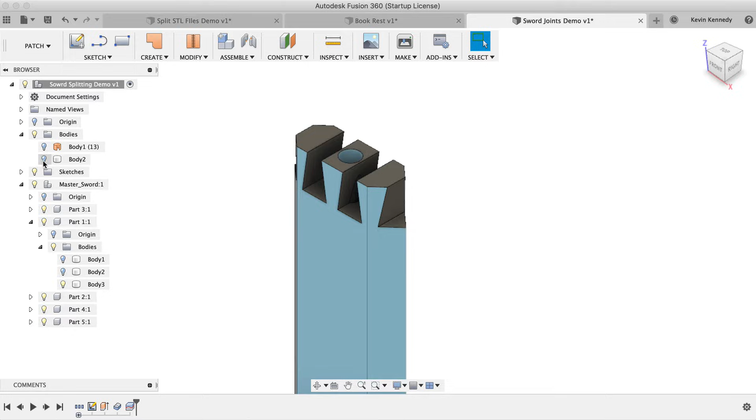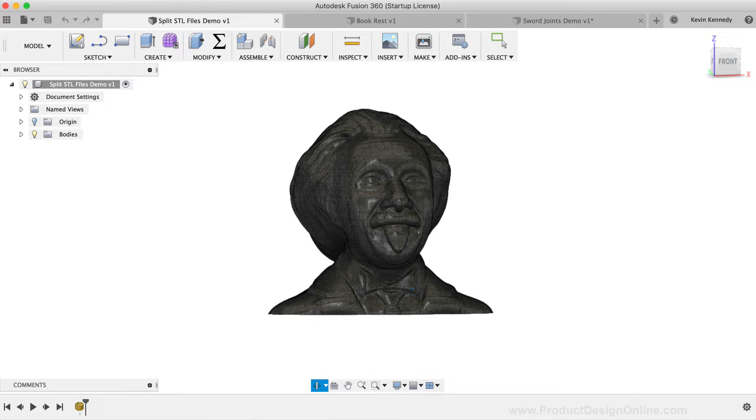By the end of this video, you'll know how to use Fusion 360 to split up your large STL files for easier 3D printing. This tutorial has two main workflows, depending on what type of model you're working with. The first workflow I'll cover is how to split STL mesh files. In other words, a lot of Fusion 360 users import an STL file from Thingiverse, and they need to slice the file into smaller pieces so it fits the size of their 3D printer's build plate.

For the second workflow, I'll show you how to split up your model if you built the model directly in Fusion 360, or if you've imported a solid body, such as a STEP file. This method has similar procedures, but will be working in a different workspace. Also, be sure to stick around until the very end of this tutorial, as I'll show you a trick or two that will help you make joints so each 3D printed part fits together firmly.

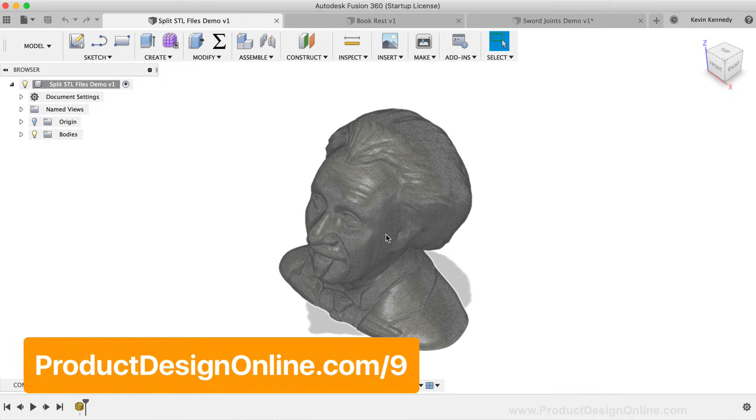I'll start off by showing you how to split up this Einstein mesh file that I grabbed from Thingiverse. I'll select the measure tool in the toolbar. Then I'll select the bottom of the model and the top of the model. You'll see that this model is fairly large with a height of over 1200 millimeters. This model is too large to print on most consumer level printers at its current size. So let's take a look at how to split the model into smaller pieces.

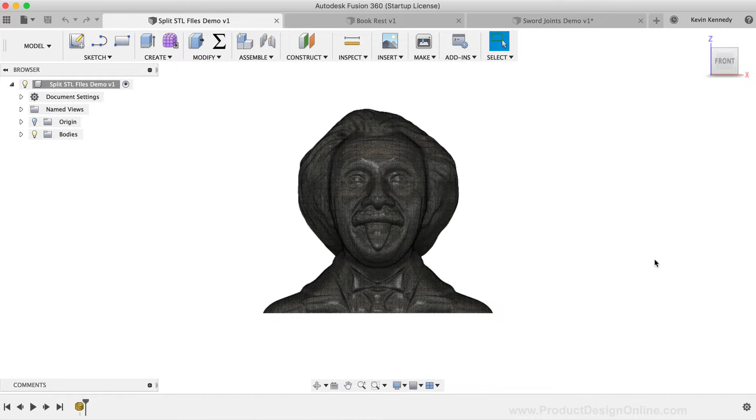Because this is a mesh file, we'll first need to enter the mesh workspace, which will let us access some additional tools that only work with mesh files. If you select the workspace drop-down list, you'll see that the mesh workspace option is not available. To access the mesh workspace and its tools, you'll first have to turn it on in your preferences. I'll select my username in the upper right-hand corner. Then, I'll select the Preferences option. This opens up the Preferences dialog box.

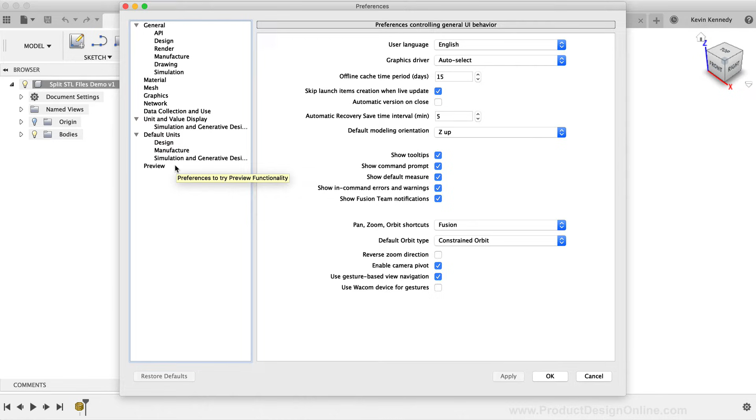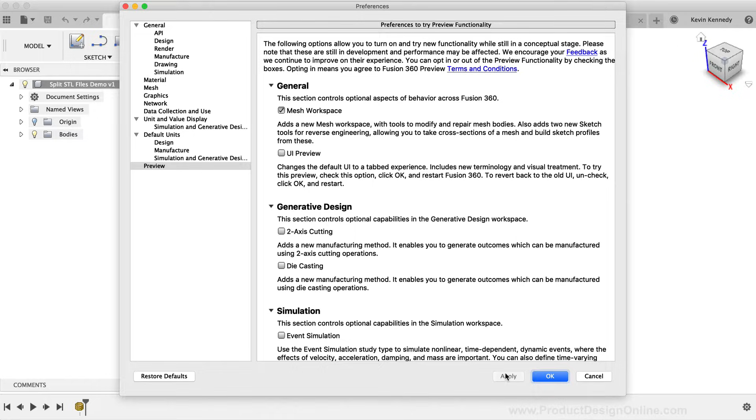From there, we'll need to select the Preview tab on the left-hand side. You'll then see the Mesh Workspace is a preview option as its functionality is still being beta tested. So to turn on the Mesh Workspace, you'll have to select the checkbox, hit the Apply button in the dialog, and then the OK button. Then you'll have to restart your copy of Fusion 360 to get the changes to take effect.

After restarting your Fusion 360, you'll see the Mesh Workspace still isn't available in the Workspace drop-down list, and that's because we're still in parametric modeling mode. We'll have to enter direct modeling mode, which doesn't capture the timeline history down below. Now, this is required because of the complex nature of mesh files and the fact that Fusion 360 cannot simply record each action that we take.

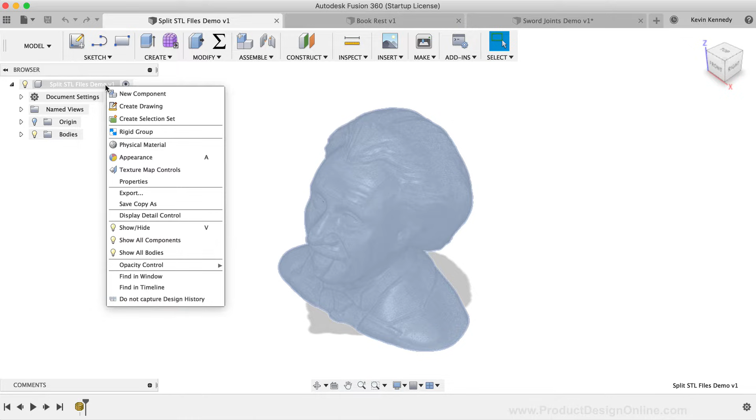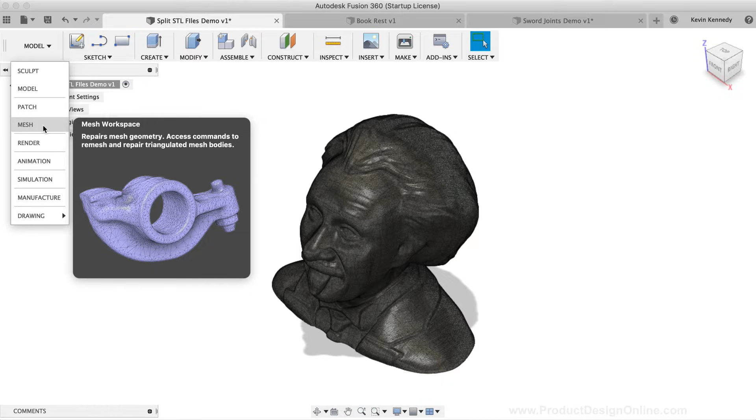To enter direct modeling mode, simply right-click on the top-level component of your file. Then select Do Not Capture Design History. You'll then get a warning message that Fusion 360 will no longer capture your model's history, which we're okay with, so I'll click the blue Continue button. If I now select the Workspace drop-down list, you'll see that the Mesh option is available. I'll select the Mesh Workspace option, which then gives us access to the unique mesh tools.

If you click on the Modify drop-down list, you'll see that there is a Plane Cut option. This is the tool that we'll use to cut the model into pieces. The Plane Cut tool lets you use an interactive plane, which opens up after you select the mesh body. The interactive plane can be moved around. However, I find that it works best to first create some construction planes exactly where you want to split your body, and then we'll reference them instead of using the interactive plane.

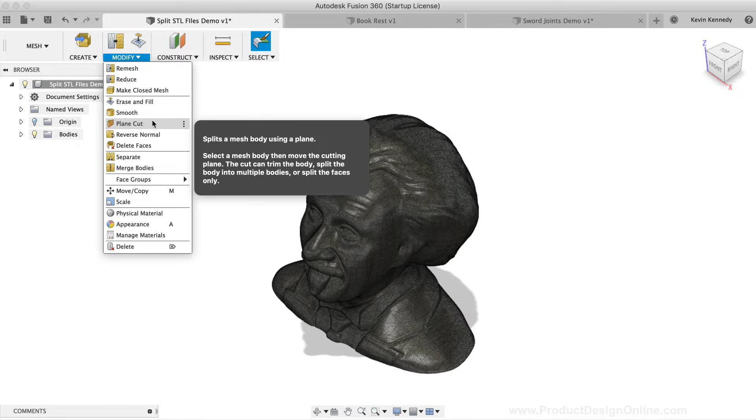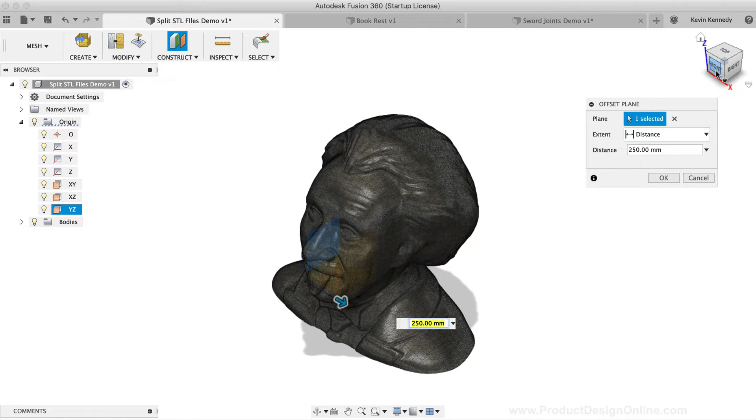To do this, I'll make sure the origin planes are turned on by selecting their corresponding light bulb in the Fusion 360 browser. Then, I'll select the offset plane option in the toolbar. I'll select the YZ origin plane as the surface to offset from, and I'll drag the blue single directional arrow over. I want this plane to be in the center of Einstein's face so I can split it down the middle.

I'll type out 540 millimeters for the offset distance. If you're following along with your own model, then you'll have to enter your desired distance based on where you want to split the model. Lastly, I'll click the OK button.

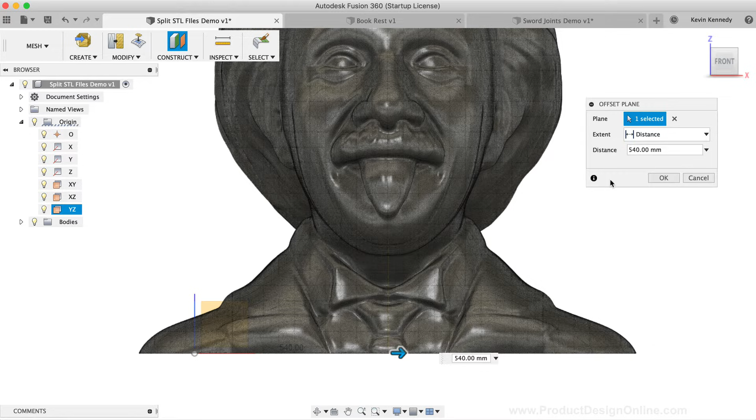I'll now select the Modify drop-down list in order to activate the Plane Cut tool. You'll see the first option in the Plane Cut dialog box is to select the mesh body. This is where you'll need to select the mesh body of your model. In this case, I'll select the Einstein body.

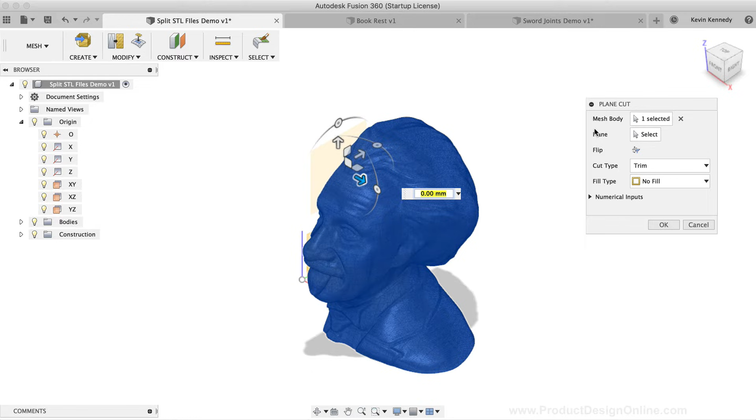The next option in the dialog box is the plane selection. I'll click on the plane selector and then I'll select the offset plane that we just created. In some scenarios, you may even find it beneficial to select the construction plane in the Fusion 360 browser, ensuring that you don't accidentally click something else.

You'll then see that we need to choose the cut type. If I select the drop-down list, you'll see that there are 3 different options listed. The trim selection will delete 1/2 of the body, trimming it away. The split faces option will split the faces at the intersecting plane. However, they will keep the body intact as one single body. This split will also create a new face group on one side of the split.

In our case, we want to completely split the model in half, so I'll select the second option, which is split body. The split body option will split the mesh body into 2 completely separate bodies.

Lastly, before we click OK, we'll want to choose the fill type. Now this drop-down list also includes 3 different options. The no fill option leaves an open hole or boundary at the cut. The uniform option fills the holes with new faces of the regular shape based on how the mesh triangles line up. Last but not least, the minimal option fills the hole with the minimum number of faces possible, which usually results in long, thin mesh faces.

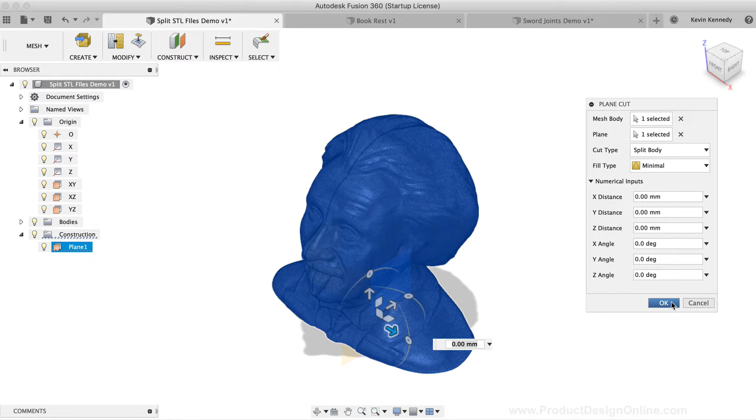It's also important to point out that you can toggle open the numerical input section, where you can translate or rotate the cut plane using numerical values. After selecting the minimal option, I'll click the OK button. Depending on the complex nature of your mesh file, this may or may not take a few minutes for Fusion 360 to process. Once it is done, you'll notice that there are now 2 mesh files in the bodies folder of the Fusion 360 browser.

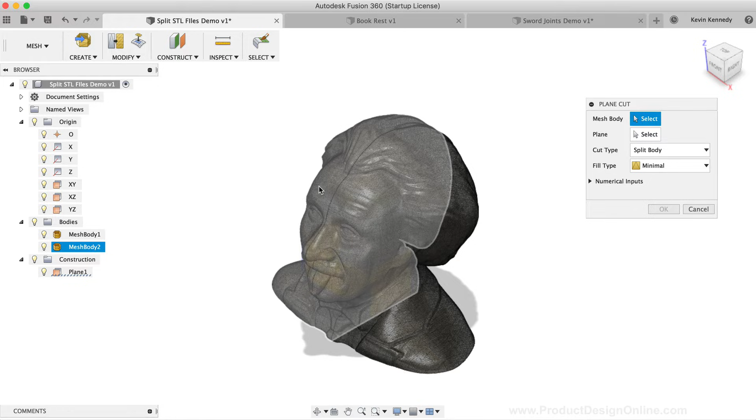At this point, we can cut the bodies into more pieces. Let's take a look at using the interactive plane. I'll right-click in order to select Repeat Plane Cut. Then, I'll select the body on the left side. You'll see the plane manipulators automatically appear, and we can move them around to reposition the cutting plane. However, as I described earlier, I find this method to be harder to work with, and I typically like to create construction planes that I can reference with the plane selector.

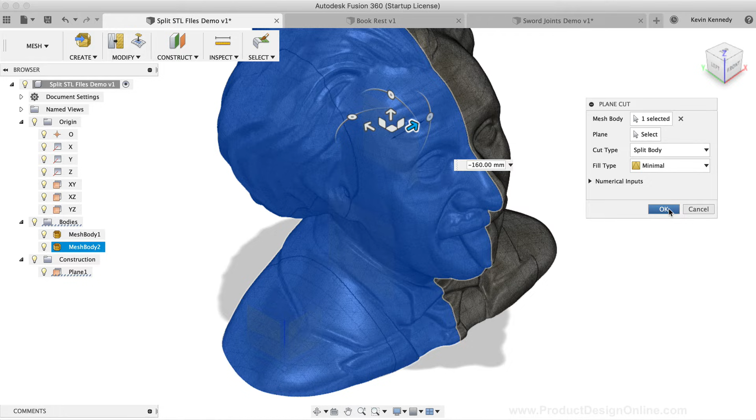You'll see this will cut the bust in the vertical direction. I'll simply drag the blue single directional arrows around until this plane is located near the beginning of Einstein's ear. Then, I'll click the OK button to see the results, as the options are set to the settings that we previously used. As you'll see, we now have a third mesh body in the Fusion 360 browser.

At this point, you can continue to slice the model into sections as you deem necessary to fit the parts on your 3D printer's build plate. You'll then be able to right-click on each mesh body in the Fusion 360 browser to save it as an individual STL file.

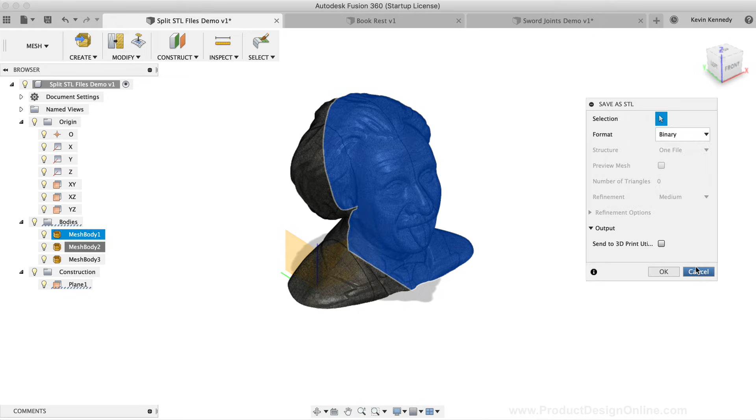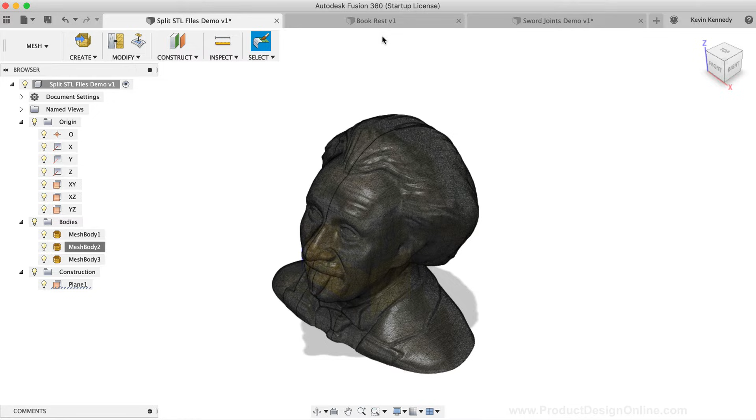Before we move on, I should also point out that this next method I'm going to show you will also work on mesh files, not just solid bodies. However, I recommend that you use the mesh workspace when splitting STL mesh files, as you'll have more control over the mesh faces. Let's now take a look at splitting up a solid body file that was either built in the model workspace or a model that was imported from a STEP or F3D file.

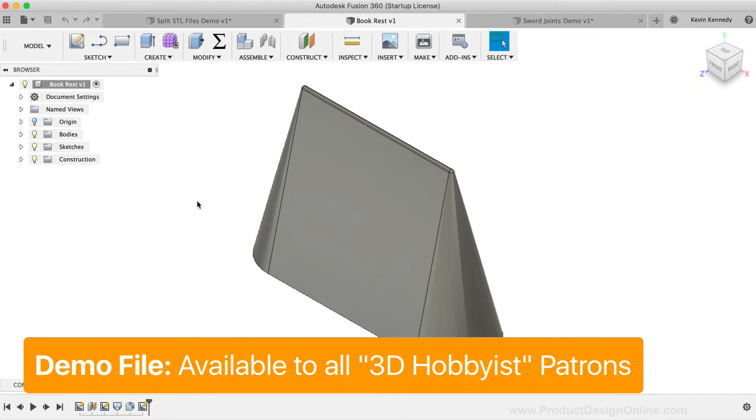For this demo, I'm going to use a bookrest that I modeled in Fusion 360, which is too long for the 3D printer's build plate. Therefore, I want to split this model down the middle so it's printable. Now the process is going to be similar to the mesh workspace. However, you'll notice that the tools will function in a different manner. I'm going to first create a construction plane, which I'll then reference with the split body command.

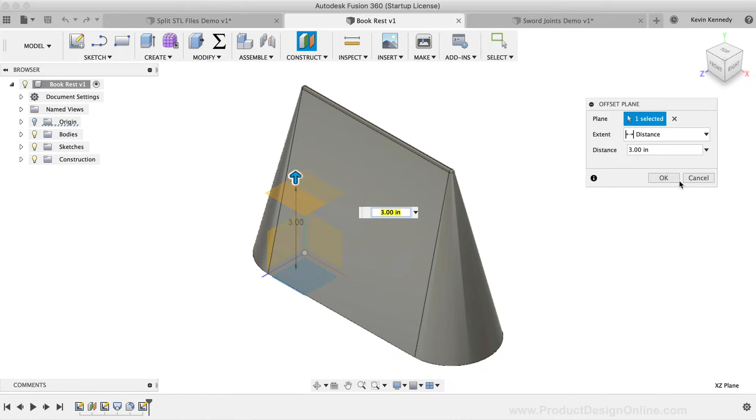I'll select the construct drop-down list. Then I'll select the offset plane option. I'm going to select the bottom origin plane, and then I'll drag the blue single directional arrow towards the top, leaving it at 3 inches, which is about the middle of the design. Then I'll click the OK button to confirm the plane's location. Next, I'll right-click in order to select the Repeat Offset Plane option.

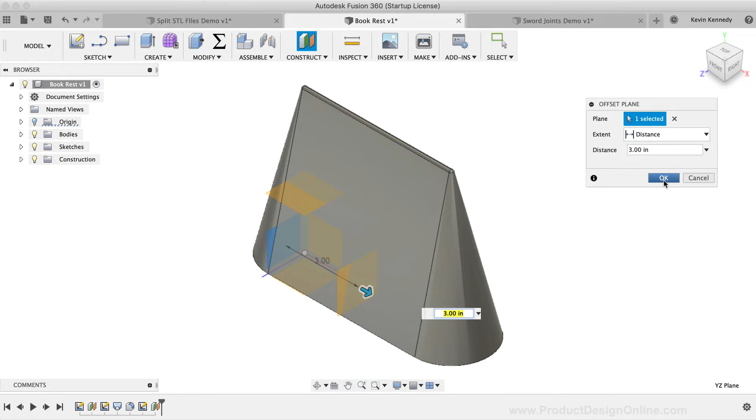I also want to create a plane that splits this model in half in the vertical orientation. I'll select the YZ origin plane, and then I'll enter an offset distance of 3 inches, putting this plane in the center as well. At this point, we'll need to activate the split body command. I'll select the modify drop-down list, and then I'll select the split body command, which is located near the middle of the list. You'll see in the split body dialog box that we first need to select the body to split. In our case, I'll select the bookrest body.

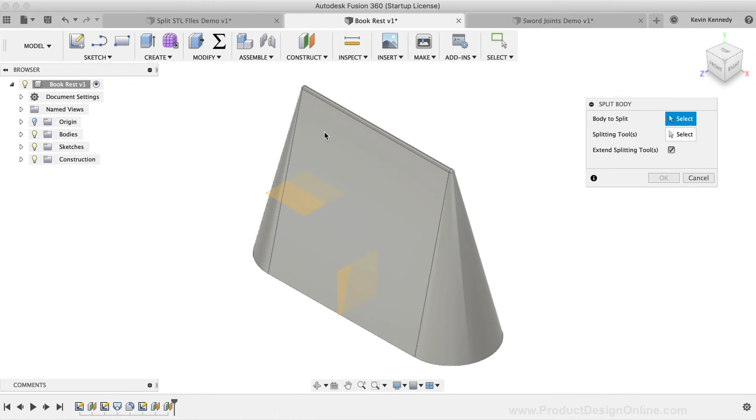However, it's important to note that you will need to select all the bodies that you want to split. I only have this single body, but you can select multiple bodies at once. Once your bodies are selected, you'll need to select your splitting tool or plural tools, as you can select multiple tools at once. Most of the time, you'll be using construction planes. However, you can also use other bodies or faces as the splitting tools. I'll go ahead and select the top offset plane.

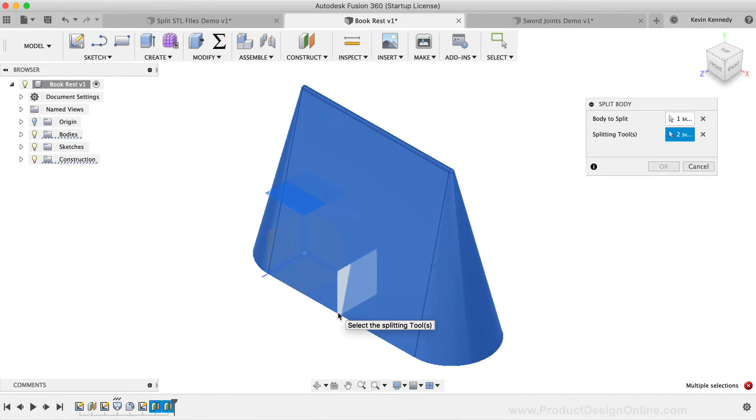Then, watch what happens as I try to select the second offset plane. You'll notice that Fusion 360 doesn't allow this because the tools would collide with each other. Therefore, it's important to note that you can have more than one cutting tool, but their paths cannot cross one another in the same feature. For now, I'll deselect the bottom plane. Then I'll click the OK button. You'll now see in the Fusion 360 browser that I have 2 different bodies in the Bodies folder.

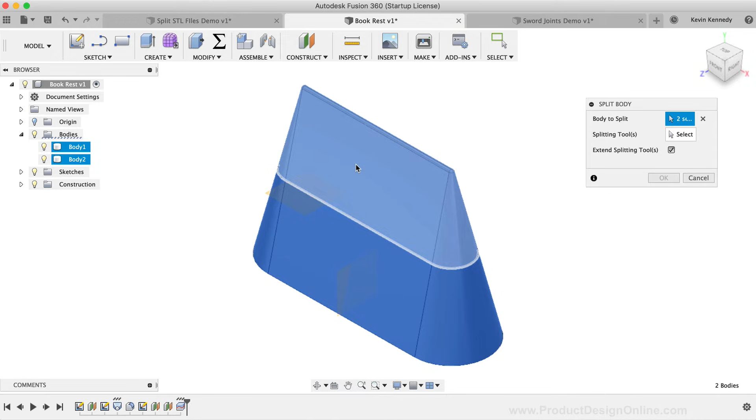I can now right-click to select Repeat Split Body, and this time I'll select both of the bodies. Then I'll click on the Splitting Tool selector, and I'll select the other offset plane. Finally, I'll click the OK button in the dialog box to confirm the results. You'll now see that I have 4 different bodies in the Bodies folder, allowing me to 3D print this design as 4 different parts.

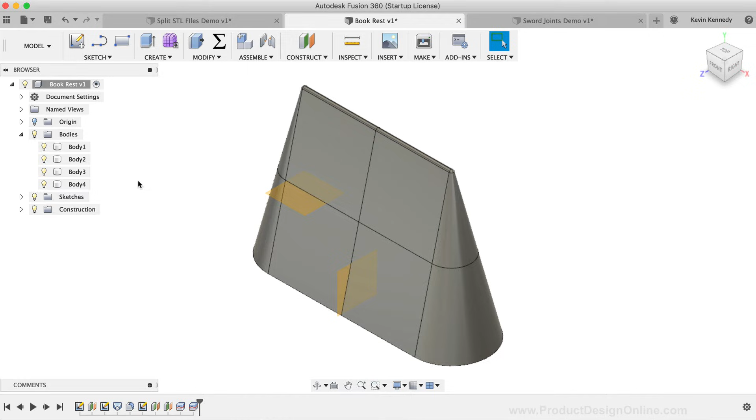At times, you may even find it helpful to move pieces away from each other as you split them apart. To move pieces around, simply select the body that you want to move by clicking on it in the Fusion 360 browser. Then, hit the keyboard shortcut letter M as in Mike to activate the Move/Copy command. Once the Move/Copy command is activated, you'll be able to either drag the bodies around by their single directional arrows, or you can always type out exact distances in the dialog box.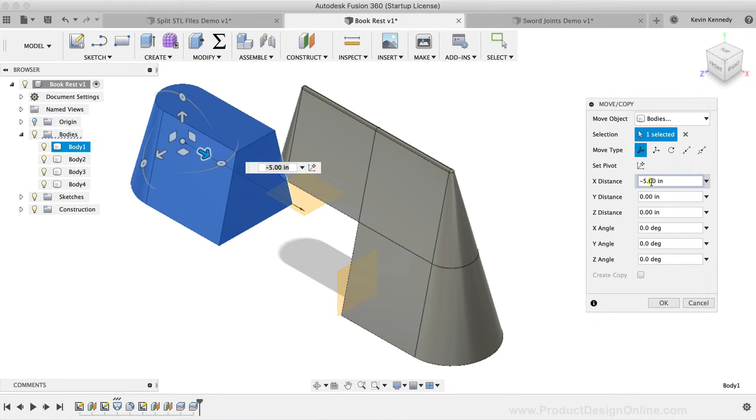One advantage to moving parts away from each other is the fact that you can add registration pins in order to make the parts fit better if you plan on gluing them together after they're printed out.

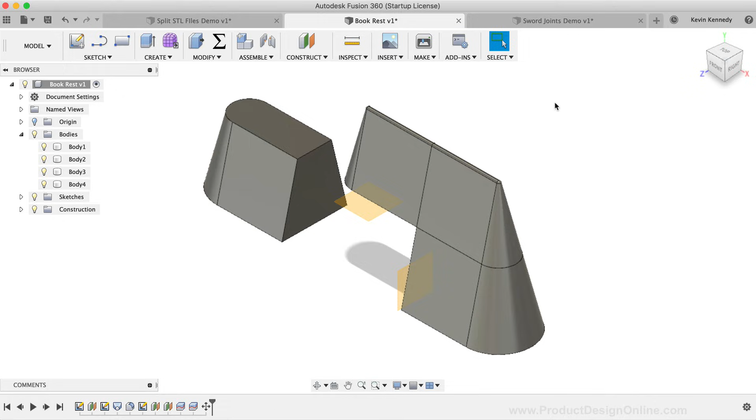Interlocking pieces can help ensure that the 3D printed models are stronger when they're glued together, especially if they're props or other functional items that are going to be tossed around. For this demo, I've grabbed this sword file from Thingiverse, which is to be used as a prop, not a weapon. Now this file was created by Andrew, and I'll have a link to it on this week's resource page.

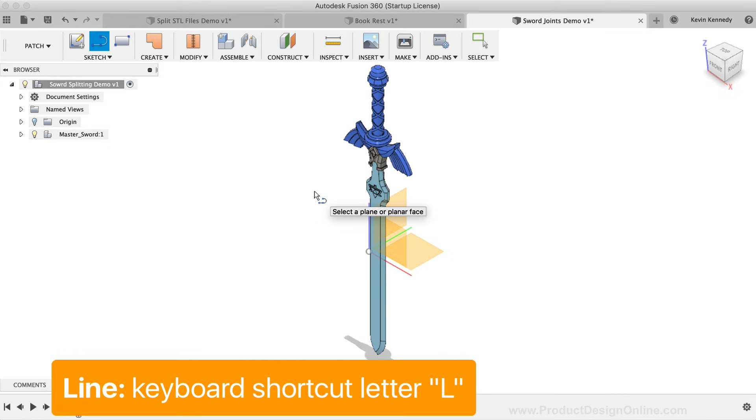I'm going to first start by selecting the patch workspace from the workspace drop-down list. If you're using the newer UI, then you'll find the surface modeling tools in the design workspace under the contextual tab labeled surface. I'm going to then hit the keyboard shortcut letter L as in Lima to activate the line tool. I'll click on the XZ origin plane as the plane to sketch on, and I'm going to zoom in on the sword file so it's easier to see the sketch lines.

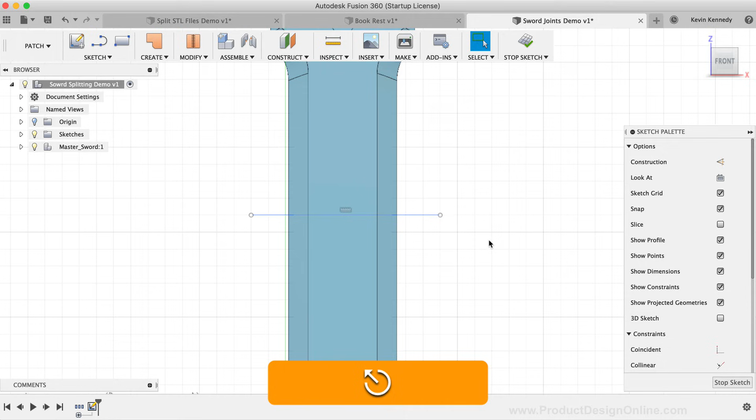First, I'll simply draw a line straight across the blade of the sword. I'm going to use this line as the baseline for a dovetail joint. I'll then hit the escape key to exit the line command. Then I'll right-click to quickly select repeat line. At this point, I'll click on the line and I'll create a line with a length of 10 millimeters.

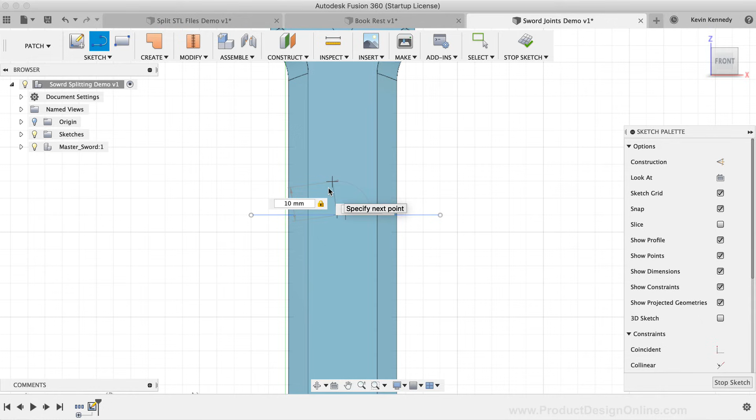Then I'll hit the tab key to lock the dimension in place and I'll type out 98 degrees for the angle of the line, as we're going to make this a dovetail joint, giving the model a lot more strength when it's glued together. I'll then create a line heading to the right 6 millimeters, where I'll click to place this line, making sure that it's horizontal.

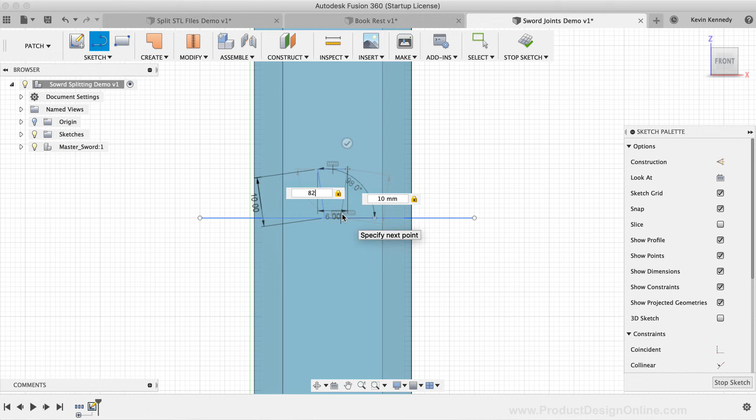To finish off this shape, I'll create the last line with the same length of 10 millimeters. However, this time, I'll have to type out 82 degrees for the angle. I'll click to place the line, and then I'll hit the escape key to exit the line command. We can now fit about 2 more dovetails on the surface of the blade, so I'll use the pattern tool to save us some time from having to sketch them one by one.

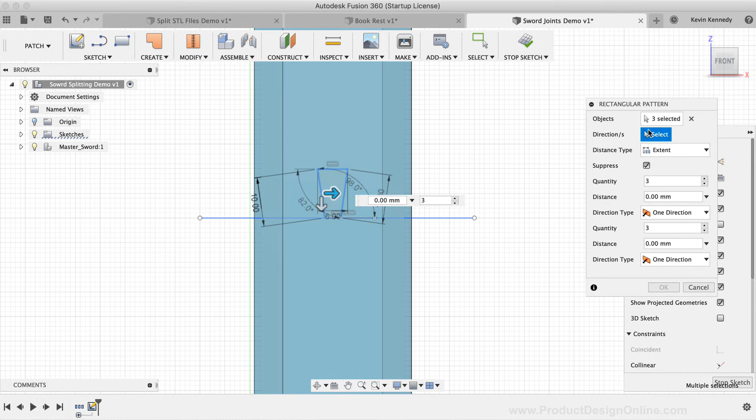I'll select the sketch drop-down list, and then I'll find the rectangular pattern feature. Once the rectangular pattern feature is activated, I'm going to select the top 3 lines that make up the joint shape. Then I'll click on the direction selector in the dialog box. For the direction, I'll select the large horizontal line. Then, I'll change the direction type to symmetric as we need to pattern a copy on each side of the original sketch.

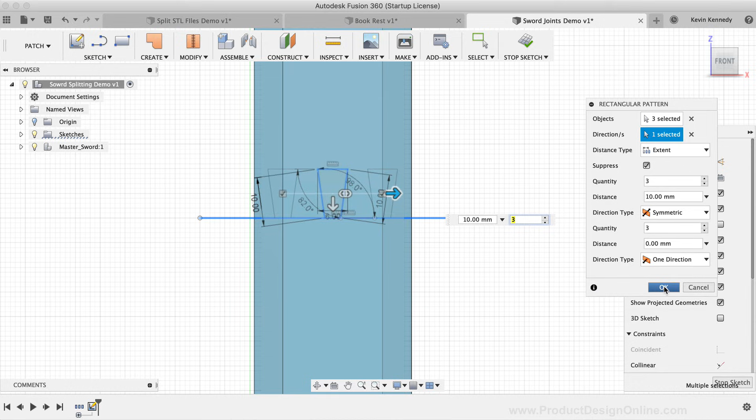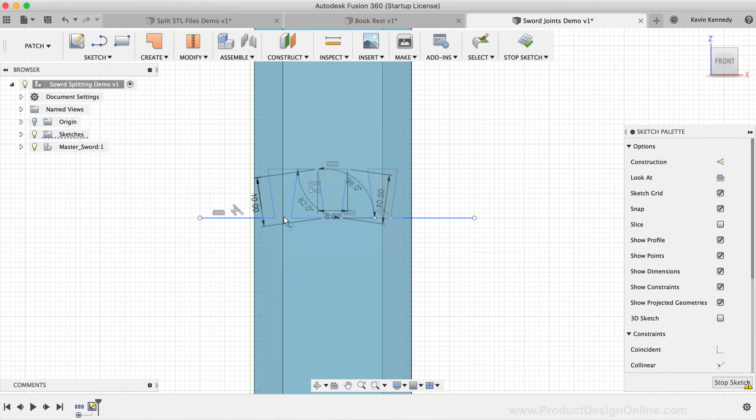After making sure the quantity is set to 3 instances, I'll drag the blue single directional arrow outward until the 3 joints are spaced evenly. Then I'll click the OK button in the rectangular pattern dialog box to confirm the pattern results. Before we can extrude this line into a surface, we'll need to trim away the unnecessary parts of the sketch. I'm going to hit the keyboard shortcut letter T as in Tango to activate the Sketch Trim tool. Then I'll simply click on the bottom lines of each dovetail to trim them away.

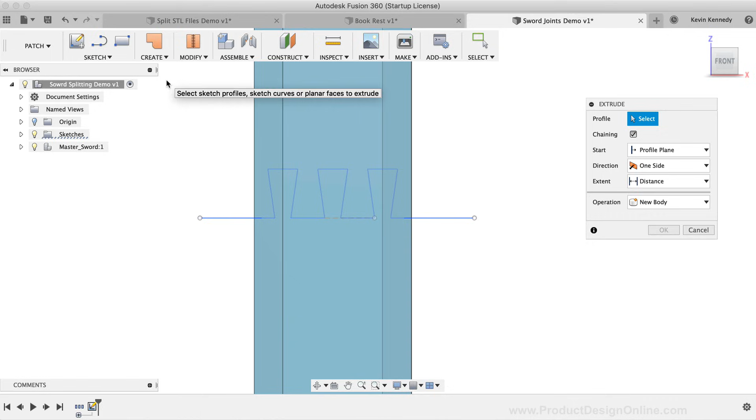We can now select the Create drop-down list and then select the Extrude command. It's important to note that this Extrude command in the Patch workspace allows us to create thin surfaces that we can't create with the Extrude command in the Modeling or Design workspace. We can then thicken the thin surface, which I'll show you how to do in just a minute. First, we'll need to select the lines as the sketch geometry to extrude. I'm going to then click on the right side of the view cube so I can see that the extrude goes through the model. Then I'll change the direction to the two sides option.

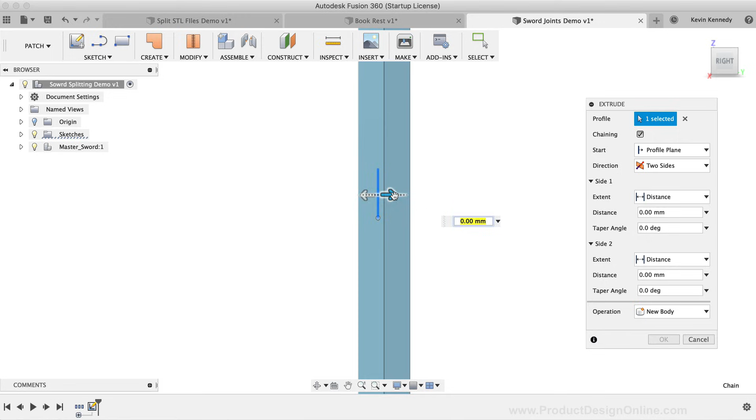This will let me drag both single directional arrows until the extruded surface extends past the object that I'm trying to cut. I'll drag the right arrow until it extends past the blade, and I'll drag the left arrow until that extends past the blade. Finally, I'll click the OK button to create the extruded surface.

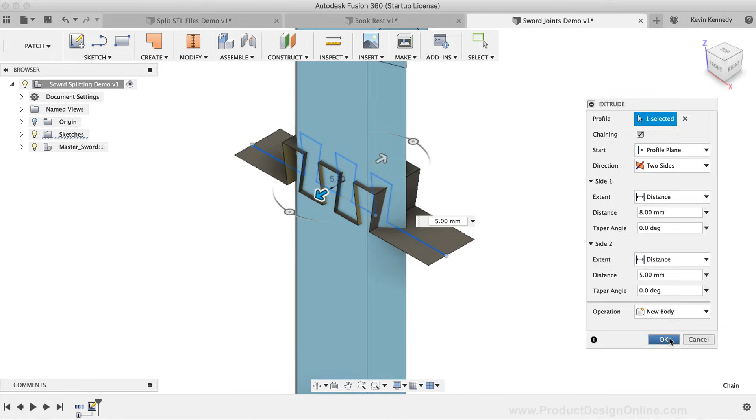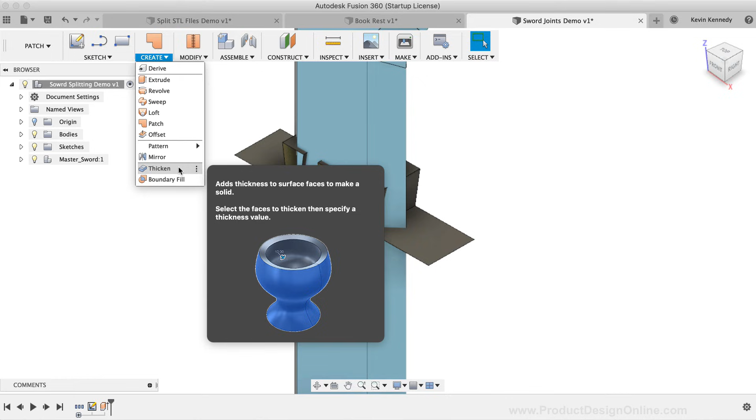If you've watched any of my surface modeling tutorials, then you're familiar with the fact that surface extrusions technically have no real thickness to them. Therefore, we'll need to thicken the extrusion that we just created. I'll select the Create drop-down list, and then I'll click on the Thicken command near the bottom of the list. You'll see that the first option is the Faces selection.

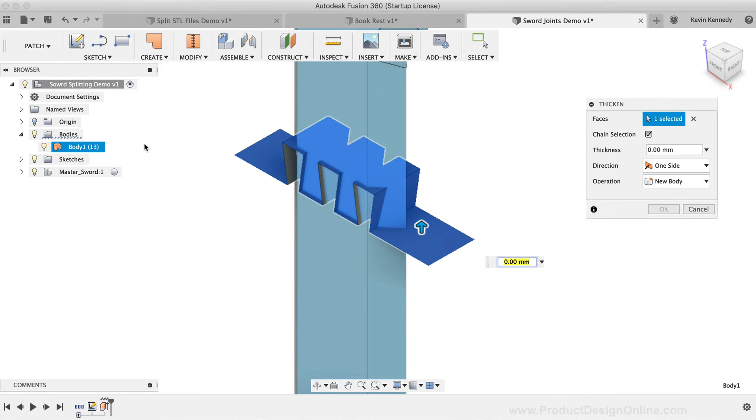If I were to select the extrusion in the Canvas window, then I'd have to select each face one by one. Because we want to select the entire extrusion, we'll be better off selecting the entire surface body in the Fusion 360 browser. I'll toggle open the Bodies folder in the Fusion 360 browser, and then I'll select the surface body, which is indicated by the orange surface body icon. You'll notice that selects the entire surface extrusion at once.

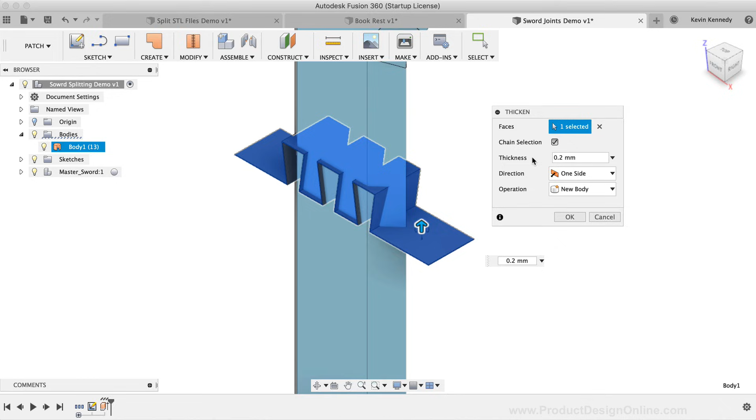We can then enter a thickness for the extrusion. This part is really important as the thickness that we create will be used to split the body in half. Therefore, we'll have to account for a small tolerance for the 3D printed part to be able to fit together. I found that 0.2 millimeters seems to work well when piecing parts together. However, you may have to experiment with your 3D printer as this can vary based on several different factors. Once I've typed out 0.2 millimeters for the thickness, I'll click the OK button in the dialog box.

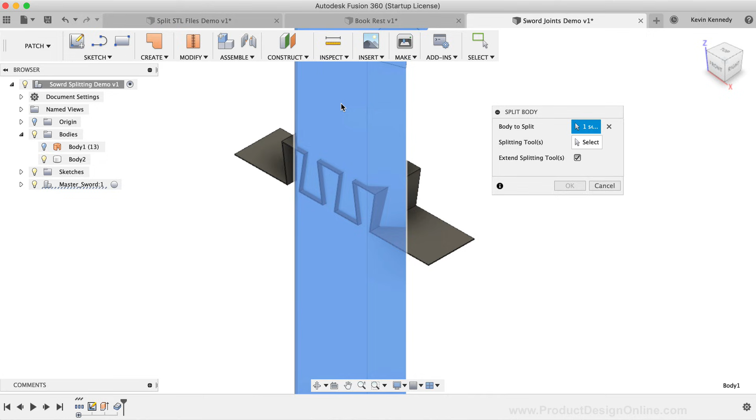We'll now want to use this really thin solid body to split the file with the split body command. I'll select the Modify drop-down list, and then once again, I'll activate the split body command. I'll select the blade body as the body to split. Then I'll select the splitting tool selector, which will let us select the dovetail extrusion. Again, you're best off selecting it in the Fusion 360 browser to ensure you select the entire body.

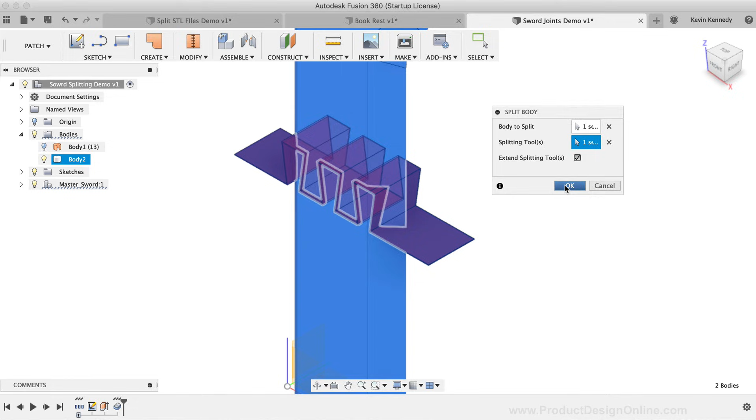I'll also make sure to select Extend Splitting Tools to ensure that the cutting tool extends through the entire blade. Lastly, I'll click the OK button. You'll now see in the Part 1 component folder that I have two bodies of the sword with a dovetail joint that will help reinforce these parts as they're glued together.

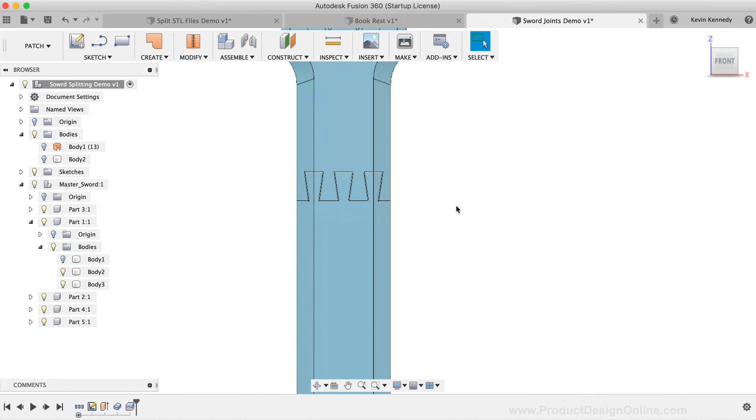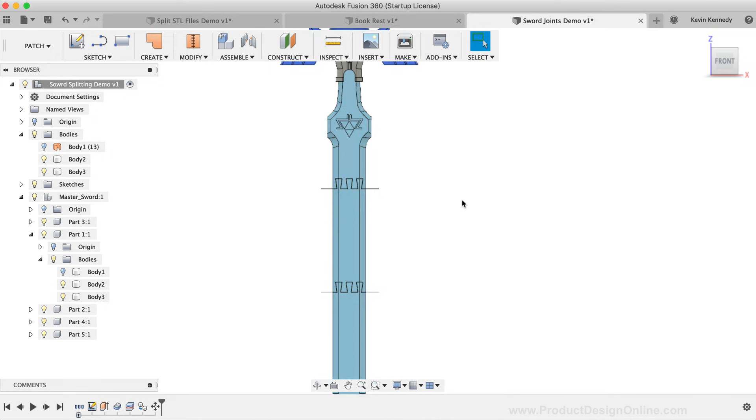The last tip that I'll show you is that after you create one joint in your model, you'll be able to copy the body to quickly create more joints of the same type. I'll select the body in the Fusion 360 browser. Then I'll right-click and select Move/Copy. I'll be sure to first select the Create Copy checkbox at the bottom. Then I'll drag the single directional arrow down towards the rest of the blade. After clicking OK to create the copy, you would have to then repeat the split body command and its respective steps.

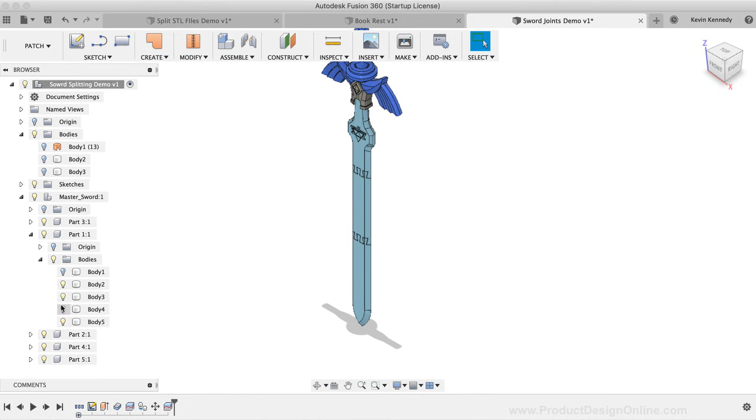I should also point out that I like this dovetail joint for most 3D printed parts. However, you can follow this same process by making several different shapes or joint types to split your model. Ultimately, the joint type, where you place the joints, and how you split the model up will depend on your particular project and the 3D printer that you're using.